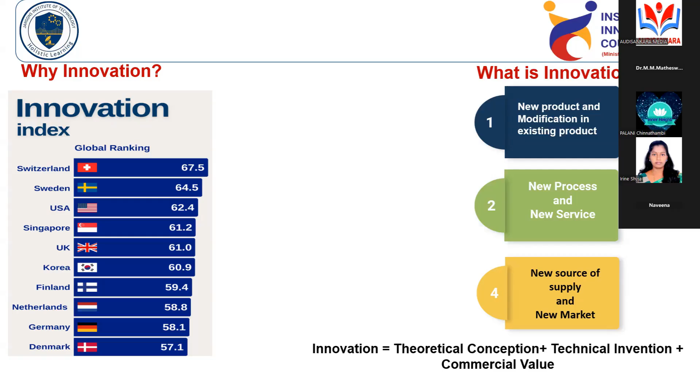We have to focus on the societal problem, how that societal problem will be solved with our technical knowledge. So how do we develop the innovation?

There are multiple case studies available, and this is not the only way, but one way is we may use the design thinking concept for innovation development. Design thinking consists of 5 steps. If you use these steps the first time in a linear manner, then in further iterations we may go with the steps in a non-linear manner up to the final product being developed.

In the first step, one is empathize. What is meant by empathize is, if you want to develop any product or service, we have to view the problem from the customer's point of view. That is a very important thing. If you are developing any product and it is not used by the customer, it is entirely wasted. So we have to view the problem from the customer's point of view.

For example, you know that Tata came up with a wonderful product known as the Tata Nano car, but unfortunately it got failed. Why did it fail? They marketed the product as a poor man's car. That is a major issue.

They did not view the problem from the customer's mindset. In India, we purchase a car only for our social status. But Tata Nano was marketed as a poor man's car, and no one wanted to get a poor man's car in those days. So if you want to solve any problem, first view the problem from the customer's point of view—that is empathy.

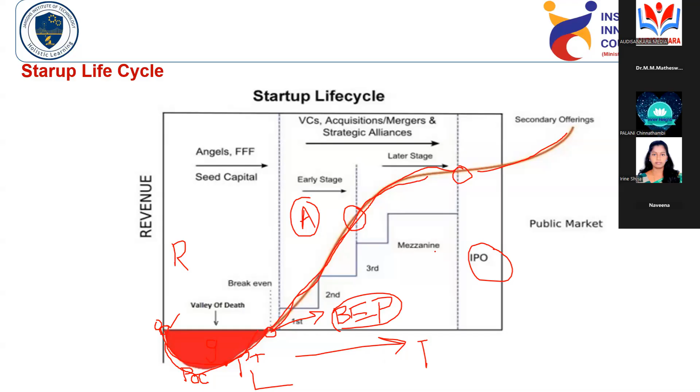So the next important thing is we move on to the requirement of solar thermal energy. Why is solar thermal energy needed in the industries? So look at this chart: the global energy consumption is 360 exajoules, and among that, 32% will be used by the industries.

Among the total, 32% will be used by the industry, 31% by the transport sector, 24% by the residential sector, and 13% by the other sectors.

Among the 32% energy utilized by industries, 74% of energy used in industries is in the form of heat only. Only 26% of energy consumed in these industries is electricity. At present in industries, this 74% amounts to 85 exajoules. Among this 74%, 45% is given by coal, 30% by natural gas, 15% by oil, 9% by renewable, and 1% by others.

So you may take that 85 exajoules of energy is required in industries throughout the world. Among that, 30% of the energy is required at low temperature range, that is only up to 150 degrees Celsius. Then 22% comes under medium temperature range, that is 150 to 400. Then 48% is required at high temperature range, that is above 400 degrees Celsius.

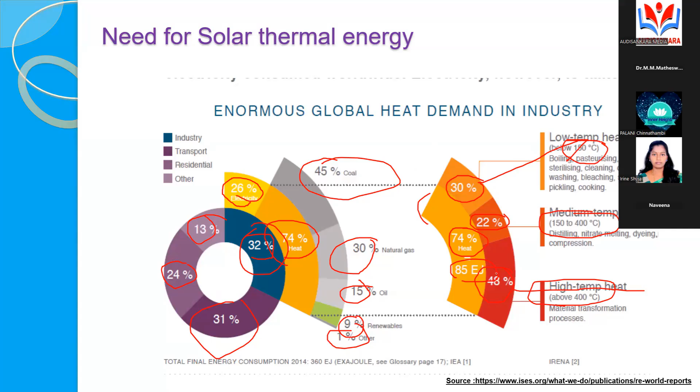Then the second point is, at present all the developing and developed countries are bothering about the 3 E's. What are the 3 E's? Energy, economy, and environment. So all the developing countries want to develop their economy without affecting their environment and the economy. That is the major challenge for all countries.

All the countries also want to reduce their global emissions to net zero emission before the year 2050. That is the ultimate objective for all countries in the world. Look at that. In 2015, the greenhouse gas emission was around 30,000 million tons of CO2 equivalent, but we want to reduce it to zero within the year 2050. That is the ultimate objective for all countries.

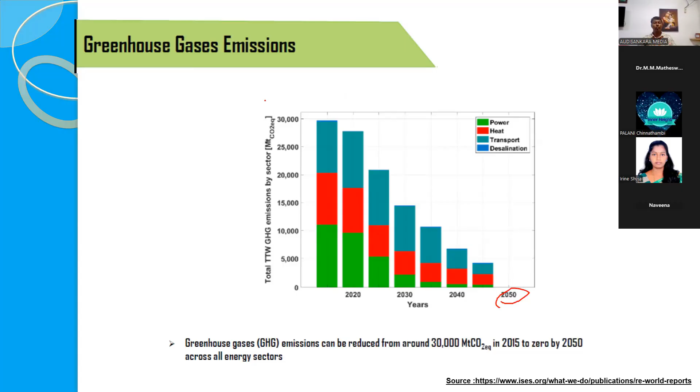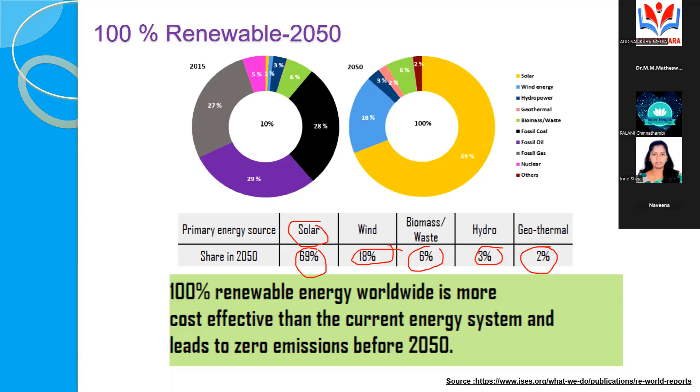So if you go for net zero emission, the technical people, environmental people, and economists find out that solar contribution will be 69%, wind will be 18%, biomass will be 6%, hydro will be 3%, and geothermal will be 2%. So if the world wants to go for net zero emission, solar energy will contribute 69% to reduce the emissions for net zero. That is another important thing that all people are thinking about solar, right? So these are all.

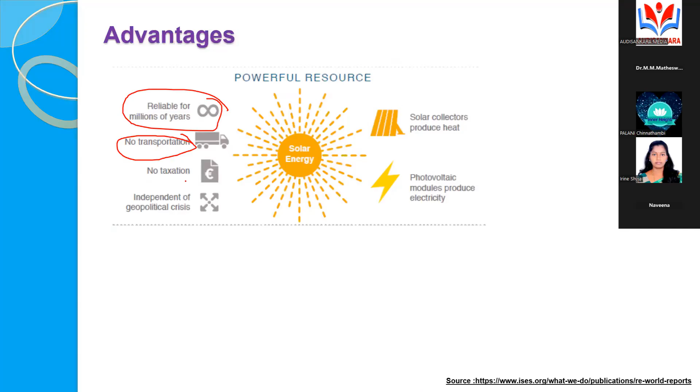So the another important thing is, if you want to go for industrial process heating, the energy is available in solar. The second one is all countries want to go for net zero emission, so there is huge potential energy in solar. Then another advantage is solar is a reliable source of energy. There is no transportation required, no taxation. Then it is not affected by geopolitical crisis. So these are all the major advantages of the solar system.

So how to use solar energy for energy generation means there are two technologies available. One is solar thermal collectors, another one is solar photovoltaics. What is solar thermal collectors means? We may directly convert it into heat energy using flat plate collectors and evacuated tube collectors. If you convert solar radiation into heat energy, that is known as solar thermal collectors. Instead, if you convert solar radiation into electrical energy, that is known as solar photovoltaics. So these are all the advantages.

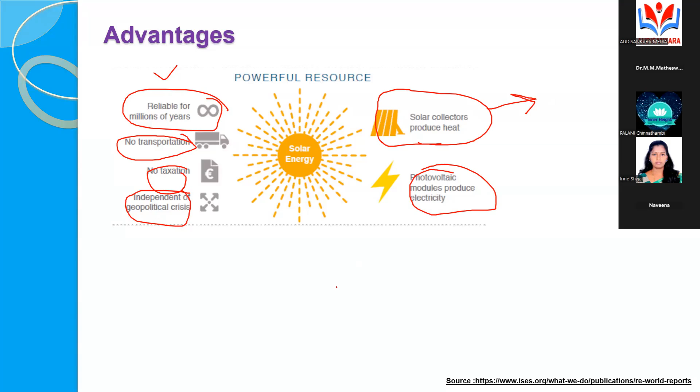So at present, we know there is an industrial requirement, there is an environment requirement, and there is an advantage of solar with these points. But what is the actual contribution of renewable energy in the world? Look at there. At present, the global renewable energy share for energy generation is nearly 23.7%. This is global, in all sectors. What is the share of renewable energy in industrial heating? That is only 9%. This is only in industries.

Among this 9% of industrial heating process, what is the contribution of solar here?

Look at the data. This is very unfortunate. The solar energy contribution in industrial process heating is 0.001%. It is very, very less. We know that there is a need of heat, and we know we have to go for net zero emission. Solar also has these advantages, but still how much percentage of industries are using this energy? Only 0.001%.

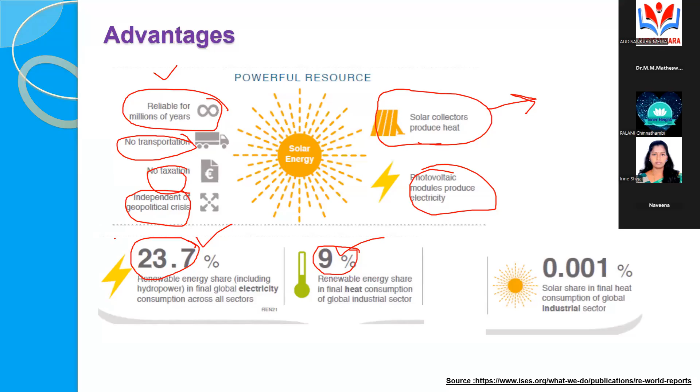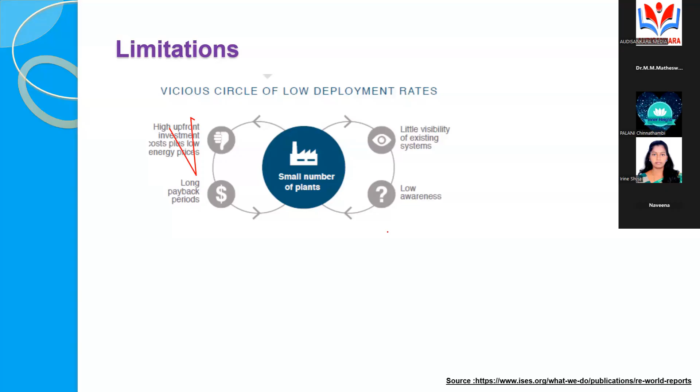Why does this happen? These are all the major limitations in solar. Why is there high upfront cost? Initial investment is very high, so that's why longer payback will be there, and also lower awareness. That's why innovation is required in this area. We need low cost, low payback, and effective technology to use this resource for industrial process heating. So that is the major limitation in solar: higher initial investment and longer payback period. These are the major limitations we have to overcome.

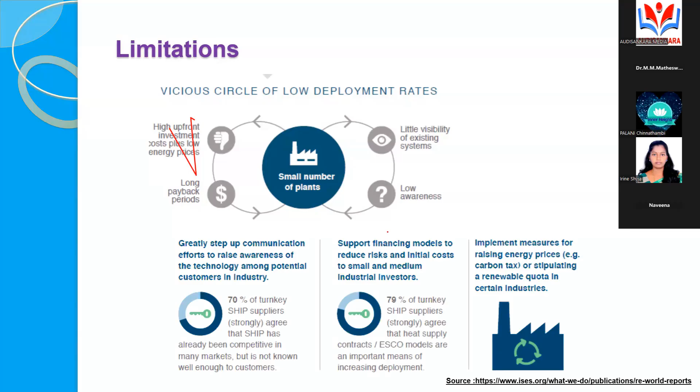At present, the solar heating in industries is given a general name known as SHIP system, that is, Solar Heating for Industrial Process heating. There is a set of collectors which heat the air or water or any other working fluid. Then the energy is stored in an energy storage unit, and the working fluid also goes to the industry for process heating applications. So this system is known as SHIP systems.

At present, nearly more than 500 industries are using this type of system for their process heating applications. The installed area, that is 4 lakh square meters, is installed throughout the world. This 4 lakh square meter is approximately equal to 280 megawatts of thermal energy. That is known as solar heating for industrial process heating applications.

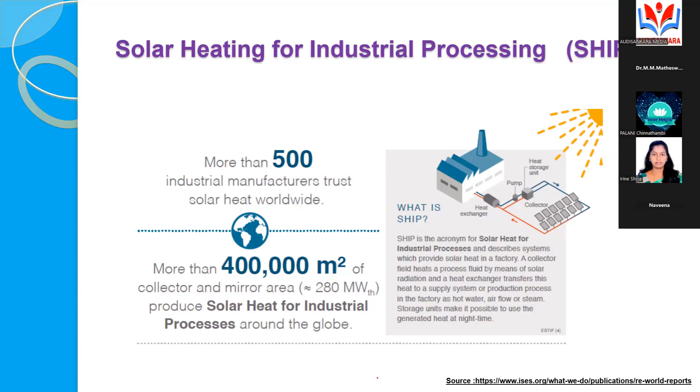With the help of this, TI Cycles reduces 56 liters of oil per day, and TVS Motors reduces 64 kilograms of LPG per day. These are all the smaller systems available in India using solar heating for industrial processing. So this is the status of India.

So what happens in the rest of the world? SHIP systems are also used in mining industries. Mining is very important at present because there is a huge need for electric vehicles, so we have to produce batteries, making mining very important work. In mining we need a huge amount of hot water for the separation process. For this purpose, solar water heaters and solar air heaters are used for segregation and drying purposes of these materials.

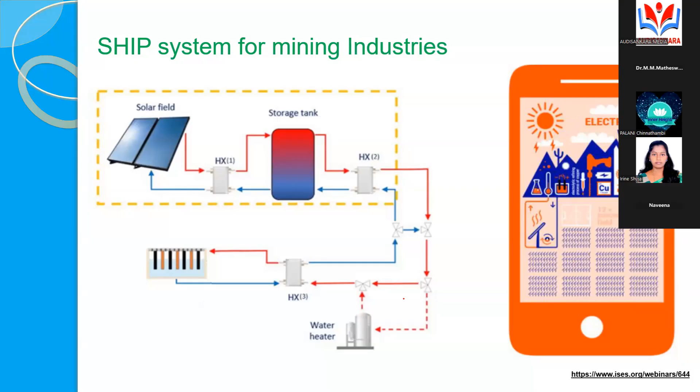I will show two case studies. Look at the Gaby mining company, available at Chile. Look at the area: 39,300 square meters of flat plate collectors are installed there, approximately equal to 10 football grounds. Look at the size of the plant. One water collector is 2 meters cross 1 meter, that is the area of one water heater. So look at there, what is the total surface area?

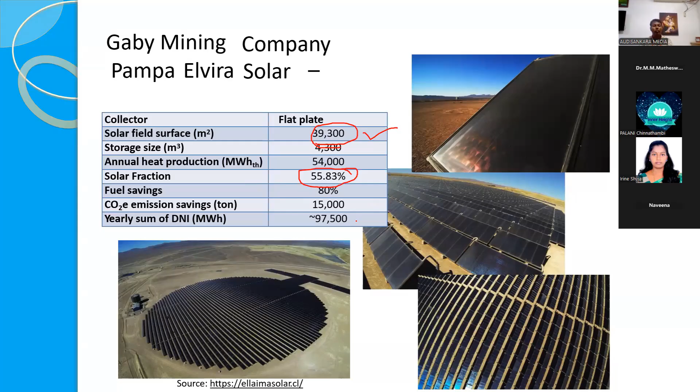If you use this, they are able to produce 54,000 megawatt-hours of thermal energy. Among the total energy requirement in the industries, 55% is shared by this plant. This is actually at Chile, which is a desert. They install such a plant to produce a higher amount of hot water, especially in mining industries.

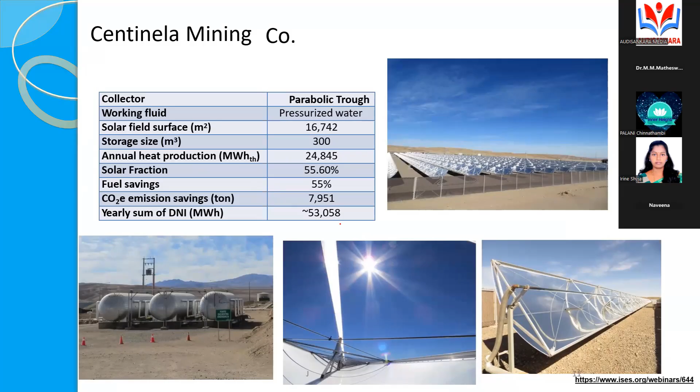Then I will go with another mining industry known as Centinela Mining Co.. Here also, the solar installed area is 16,742 square meters. The annual energy produced by this system is 24,845 megawatt-hours of thermal energy. Among the total requirement of energy, 55% is supported by this system. These are all such huge plants available in the world, especially for supplying hot water.

So I have one more plant, Ram Pharma, available at Jordan. It's a medical company in the pharma industry. They use Fresnel collectors to produce hot steam. The installed area is 550 meters square, and the thermal power produced by the system will be 222 kilowatts of energy.

Look at the operating temperature: 210 degrees Celsius of steam is generated. The fuel saving will be 42%.

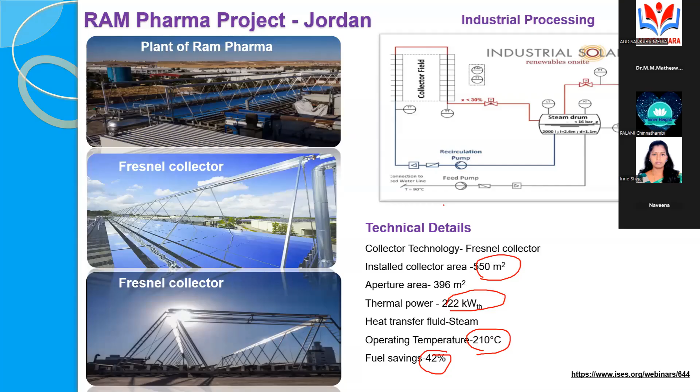So these are all big plants available throughout the world used for mining industry, pharma industry, all these things they are used. But India is an agriculture nation. At present, we are using this type of system especially for low temperature applications, especially in agriculture drying.

In agriculture, one important thing in India, throughout the world, is that a particular commodity, you may take moringa or any commodity, may be produced during a certain time period. So at that certain time period, all the farmers come up with a huge quantity of that product. So in the market, the product value gets reduced, and if the product is not sold out, the entire thing will get wasted.

You know tomato and onions, how during a certain seasonal time, huge amounts of products will be available in the market. During the off season, the price will go very high, but the product is not available. So that is the issue.

One data says the wastage of onion in India is nearly about 3,000 crores per year. So that is the data we get.

So one idea to reduce the post-harvesting losses in India is to dry those products and convert them into a value-added good, to be sold in the market during the off season. So if you want to dry those products...

At present in the market, there are enormous dryers available - electric dryers, heat pump dryers, conventional solar dryers, all these things are available. So our idea is how to use these solar dryers, especially for use by Indian farmers, to convert their product into a value-added product and sell it at a higher price.

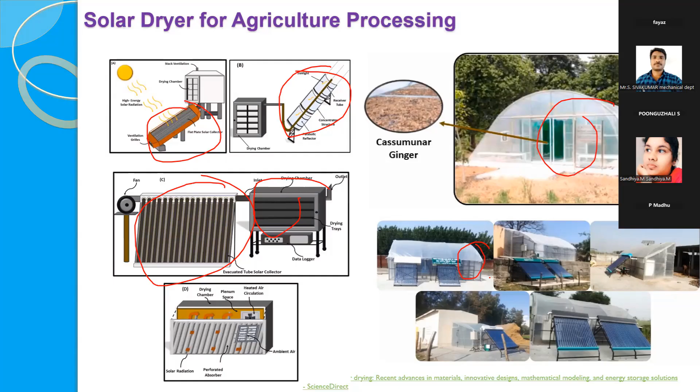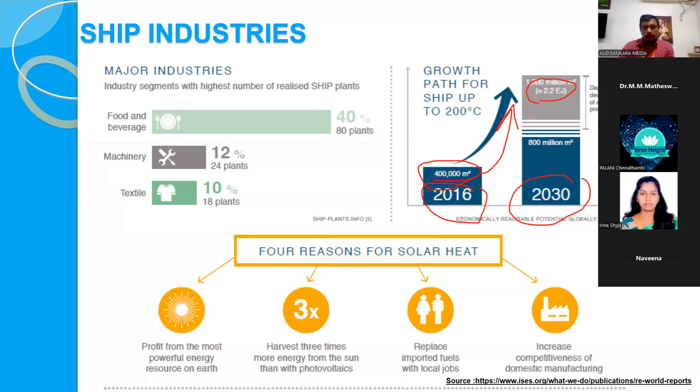Look at this graph. At 2016 data, there are 4 lakh meter squares of solar SHIP systems installed throughout the world. Look at this projection. Within the year 2030, it is expected 1,300 million meter square of solar SHIP systems to be installed throughout the world, expected to produce 2.2 exajoules. But due to COVID, there is some drop in this data.

So there is a huge opportunity. Even though we know the requirement and there is a need, solar is still lagging, it is not effectively integrated in all the industries. Why? There is a lack of education and training, a lack of suitable planning and guiding tools, and a lack of awareness, and industries are only looking for long-term proven technology.

For example, in a textile industry, if you need steam, immediately the company goes and purchases a boiler. They don't think about solar. Then there is a high initial investment, the system cost is also very high for solar at present. So these are all the challenges we have.

So with these things, we understand that there is a need for solar energy, and these are all the drawbacks and challenges, so as to effectively integrate these systems with the actual application of the industries. So what is the thing? We have to develop a proper design for solar thermal systems for any industry, it may be agro processing or industrial process heating. So we must have proper design guidelines.

We have to reduce the initial investment, create a lot of education and training, and develop and promote the system for industrial usage. So these are all the challenges faced by the researchers and innovators, especially in solar air heating.

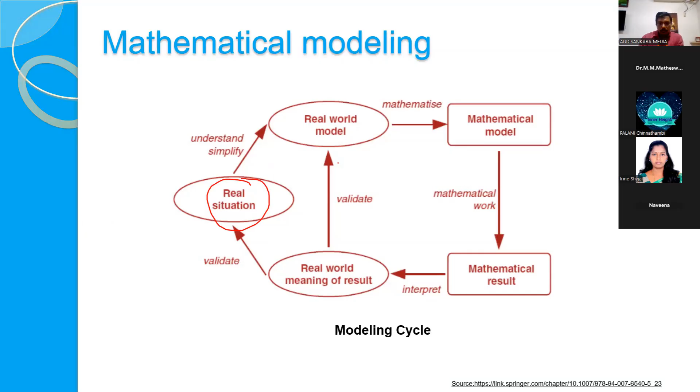If we go for actual experimentation, the cost will be more. So we try to make a suitable analytical or mathematical model to check whether the idea will work or not. My idea is converted into mathematical equations, then these equations are converted into linear equations in a mathematical model. These equations are solved under actual environmental conditions, and we validate with the real system to check whether the idea is working or not. So that is the first step: developing the analytical model for our solar air heaters.

So what is existing, and what is our new novelty? Look here - this is the simple solar air heater. In the normal air heater, we have very simple components. The first component is known as glass cover, the second is the absorber plate, the third is the jet plate, and the fourth is the back plate.

What is meant by jet plate: the plate looks like this, it consists of a lot of perforations - perforation means a lot of small holes. This plate is attached here. In a normal solar heater, the air passes only parallel to this absorber surface.

So what happens when the sunlight falls over the glass cover, it passes through the glass cover and heats this plate. The plate gets heated. Once the plate is heated, if you pass the air under this plate, the air gets heated and goes out. Very simple - ordinary radiation mode of heat transfer and convection mode of heat transfer, the air is getting heated.

But if you use this simple solar air heater - here is the air, this is my absorber plate - when the air passes over there, a boundary layer gets formed like this. This boundary layer acts as an insulator for heat transfer, so the heat transfer gets reduced due to this insulating layer. That is the imaginary boundary layer.

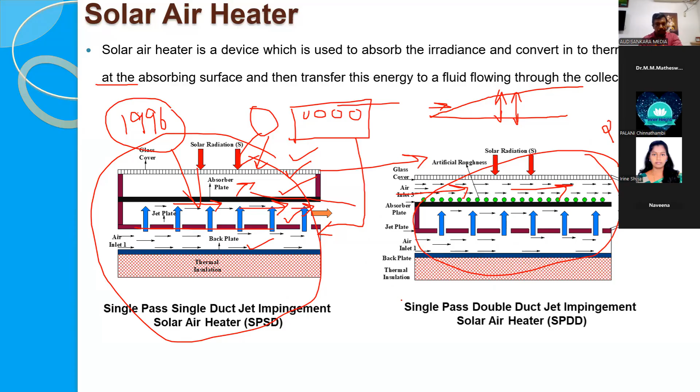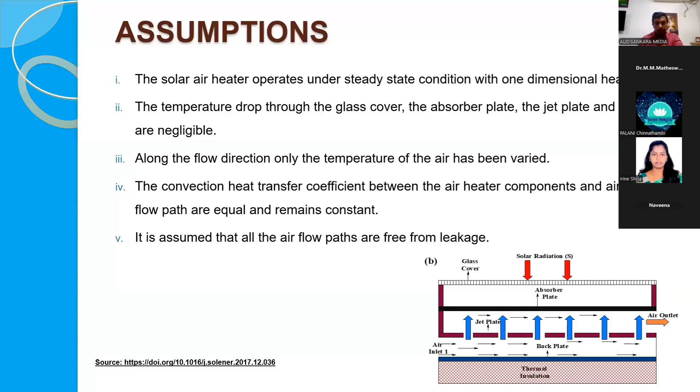Before developing an actual experimental model, I want to know whether the idea will work or not. For that purpose, I am developing an analytical model to check whether the system works or not. You know that for any system, if you develop an analytical or mathematical model, we have certain assumptions. So I am developing these assumptions. After that, it's a very simple case.

If you want to develop an analytical model, there are 3 equations: continuity equation, momentum equation, and energy equation. If you write these equations for each component of your solar heater or water heater, the governing equations will come out. You know that in the world, all systems work based on some fundamental physics. If this fundamental physics is converted into mathematical form, those things are known as governing equations. If these equations are solved for actual boundary conditions, that is known as analytical modeling.

So what is the physics here? There are various components. The first component is the glass cover - look at there, I have a glass cover here. What is the physics in the glass cover? As per the steady state condition, the energy supplied into the glass cover is equal to the energy that comes out from the glass cover. This is the fundamental physics we have: energy into the glass cover always equals energy out.

So how does the glass get the heat? Only from solar radiation. This first term represents the energy injected into the glass cover from the sun. It also gets heat from the absorber plate through convection mode of heat transfer, and also from the absorber plate through radiation mode of heat transfer. So this is radiation, convection, and radiation. I write this equation based on the fundamental heat transfer problem.

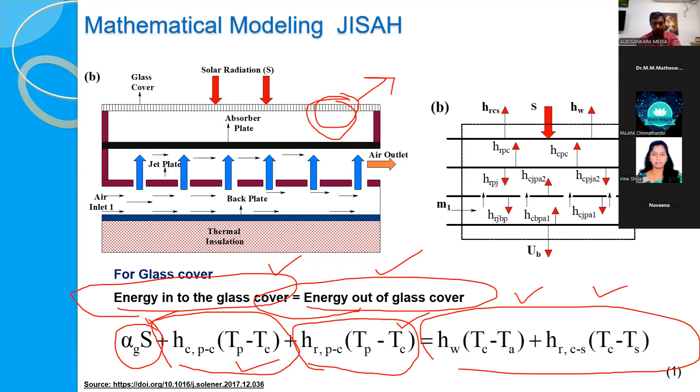I write this on the left-hand side, so these 3 terms represent the energy into the system. Then how does the energy go out? The energy goes out to the ambient and the sky with the help of radiation and convection mode of heat transfer. I will put those terms on the right-hand side, so energy in equals energy out. This is for the glass cover.

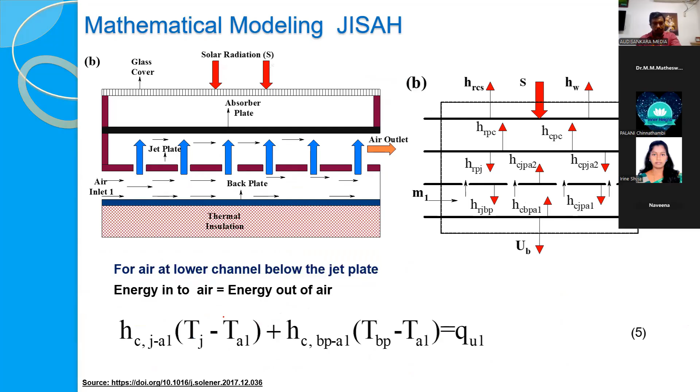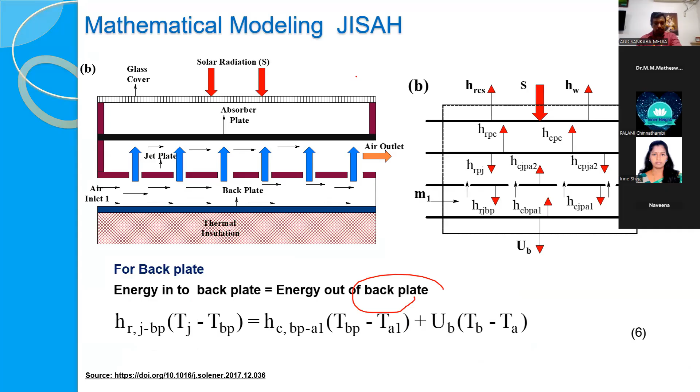In the same way, I have to write it for the absorber plate, and in the same way for the jet plate. There are also 2 airflow paths: the upper airflow path and the lower airflow path. I will write the energy balance equations for the airflow paths also. Then the last one is the back plate. So I have 6 components in my solar air heater, and I will get 6 equations.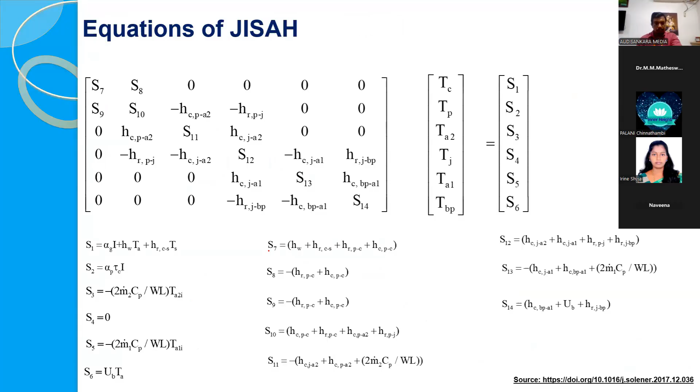Once I have the 6 equations, these algebraic equations are written in matrix form. Then I will write code to solve this matrix using a matrix inversion technique, and I will get the results. These are all the various formulas used to calculate the convective heat transfer coefficients, and there are Nusselt number correlations. With the help of these equations, I will calculate the various constants and variables required to solve the mathematical models.

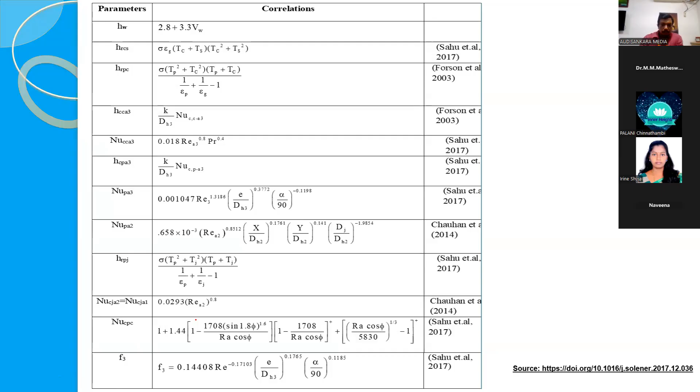Once I solve this, I am calculating the thermal efficiency, thermohydraulic efficiency, and exergy efficiency. Thermal efficiency means how much energy is supplied to the system versus how much energy I'm converting as thermal energy from my solar heater. Thermohydraulic efficiency means, among that collected energy, how much is consumed for pumping power - that is to be subtracted, which gives the hydraulic efficiency. Exergy efficiency is the second law efficiency.

So what is the maximum possible efficiency when it is reduced to ambient conditions? That is known as exergy efficiency.

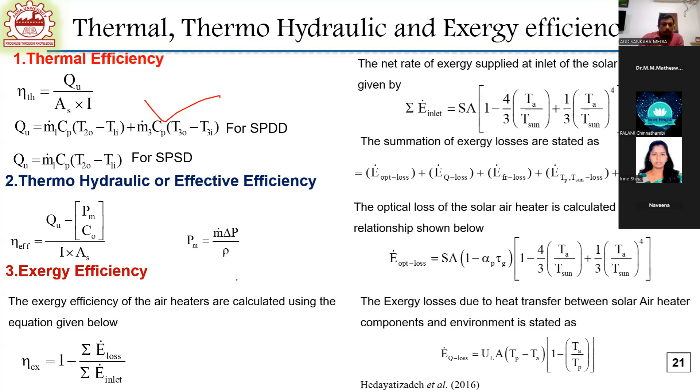This flowchart shows how I am developing the code and how the code will work. Look at that, the convergence criteria will be 0.01 degrees Celsius. With the help of this process, I am solving the equations.

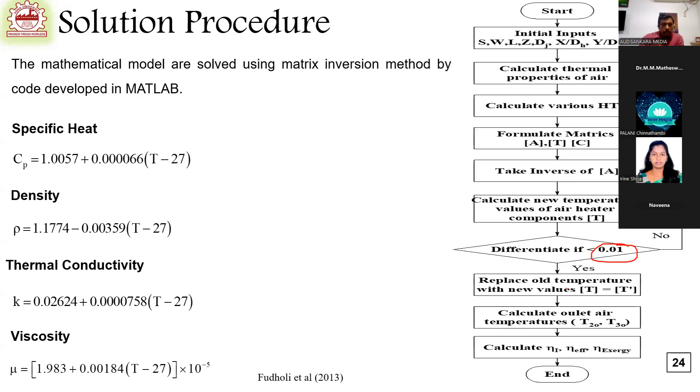Once I solve these things, I will get the results. Look at that, the thermal efficiency of the system and the effective efficiency of the system for my case. Look at this line. For an example, I will take this effective efficiency.

Look there, this is for the simple system. These lines are for my proposed new system. There are multiple lines in my proposed system because I am changing the roughness of my design. There are various designs I am using in the roughness.

So before going to the actual experimentation, I know how much percentage improvement there is in my proposed system when compared with the existing system.

SPSD means single pass single duct jet impingement solar heater. SPDD means single pass double duct jet impingement solar heater. Look at there.

At 0.01 kilogram per second, at this condition, my existing system will be 60%, but the proposed system with arc-shaped roughness will give around 70%.

So with the help of that, before going to the experimentation, we are able to know how the performance of the system will be. That is the power of analytical modeling.

If you know the proper analytical modeling, we know how the system will perform, what are all the key parameters, and what dimensions need to be fixed to get the maximum efficiency of those systems. That is known as optimization.

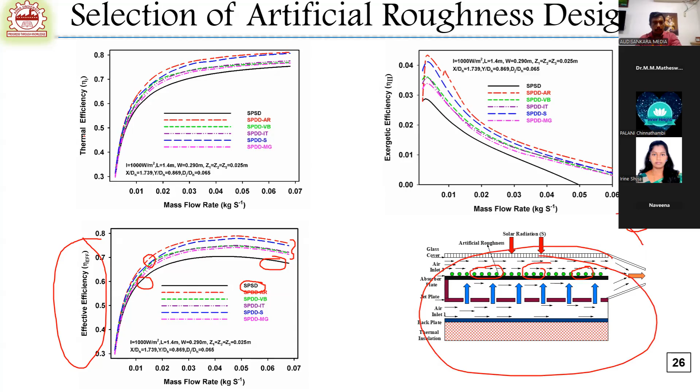So initially in 2017, I developed this type of jet impingement solar air heater and checked its performance. These are all the other graphs with various flow rates, showing how the useful energy gain will be.

If the inlet temperature is varied, how will it be affected? What is the effective efficiency with respect to the length of the solar air heater? Look at there, if the length is increased, the performance will improve.

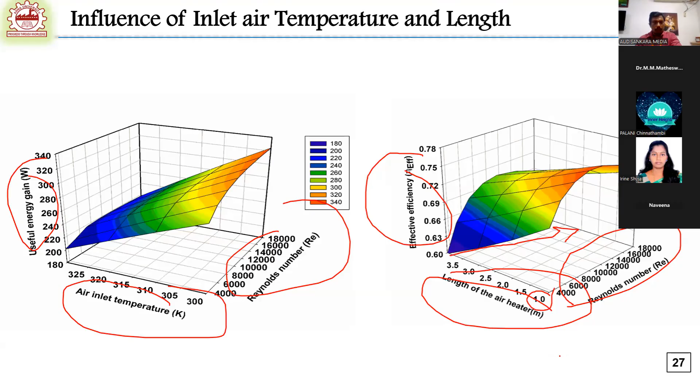But up to a certain case, if you go with 1 meter, look at there, what is the flow rate to be measured. Based on the temperature and heat output requirement from this data, I may be able to select the length of the solar air heater. Those things were done analytically.

Then, in my solar air heater, there are two passes, one at the top and another at the bottom. So what mass fraction should be maintained? Should the bottom be higher or the top be higher?

In my simulation, I found that if you maintain both sides equal, that means 50% of the flow at the top and 50% of the flow at the bottom, we will get maximum efficiency. Those things we will get.

So after doing this analytical model, only then do we know the dimensions to be fixed, and for a particular temperature, what length and width to be fixed. We analyze all these things, then develop the actual experimentation, and develop correlations for Nusselt number and friction factor. This is the one type of solar air heater we developed in 2017.

But still there are some drawbacks. The drawback I faced here is that the flow rate will be around 100 kilogram per hour. If you go for the actual market, 100 kilogram per hour is very, very low for such a huge system.

For example, if you go for solar dryers in the market, they range from 400 square feet to 1000 square feet. If you supply only 100 kilogram per hour, when will the dryer get heated? So that is a major drawback and challenge for us.

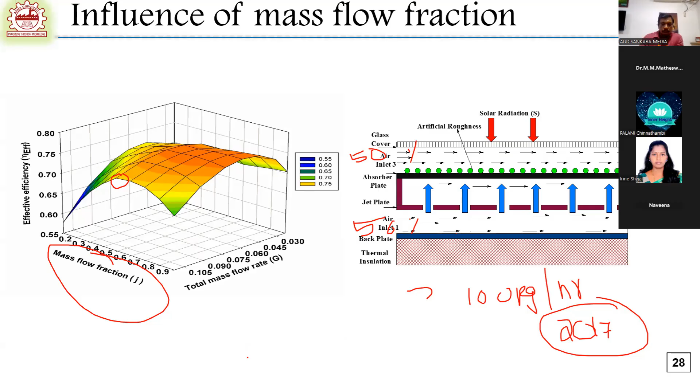So then I am developing another solar air heater. In this solar air heater, we are integrating a rectangular solar air heater with fins and baffles. Fins will enhance the area and increase convective heat transfer. Then we are attaching baffles.

So if you have fins and baffles, the turbulence will get increased and the solar heater performance will be increased. So we developed this model and tried the analytical model, with fins and without fins, with baffle and without baffle, what baffle thickness to maintain - 5mm, 10mm, 15mm - and how the performance and efficiency will be. From the results, we identified that arc-shaped roughness with the fin solar air heater with baffle thickness of 15mm has higher performance compared with other studies.

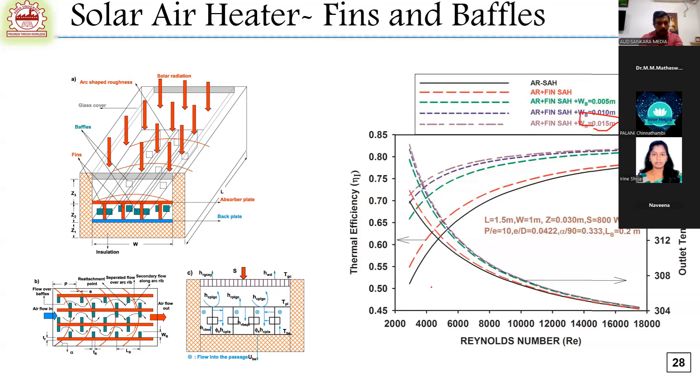But in the flat plate solar air heaters, the major drawback is we cannot go for much higher flow rate. If you increase the flow rate, the temperature will get reduced. That is the major drawback, and also the pressure drop will be very high. So to overcome this, I am developing one more solar air heater to reduce the pressure drop.

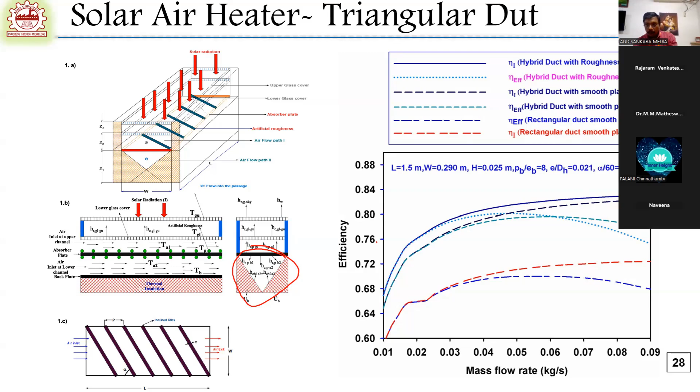So this is the thing. From 2017 to 2021, I worked most of the time with triangular duct and rectangular duct solar heaters. The major drawback we found there is that at higher mass flow rate we may get lower temperature. So that is a major drawback.

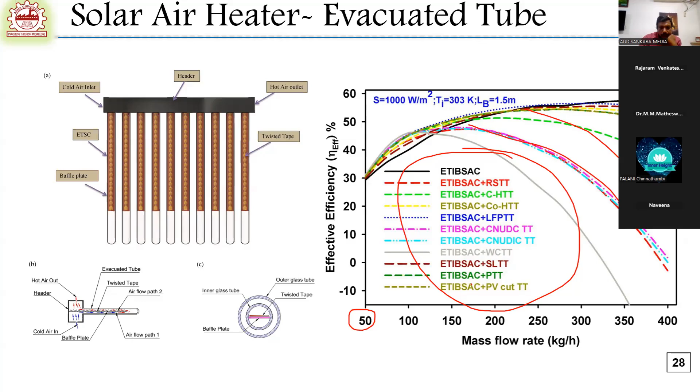So if you want to do any experimentation, we need grants and funds. In 2022, I developed all these systems as an analytical model, with a small experimental setup in my institute. During that time, the Ministry of Consumer Affairs announced a challenge known as the Onion Grand Challenge. They required a dryer, especially for onion drying, needing a much more efficient drying solution. That's why we obtained an initial small grant.

We won the Onion Grand Challenge in 2023, to convert our idea into proof of concept and proof of concept into a prototype. So what idea did we propose there? Look at this slide - we integrate the evacuated tube with jet impingement technology.

In the solar air heater, if you use turbulators, the pumping power will be high. Even though the output temperature is good, the pumping power is high. So instead of turbulators, what we proposed in the onion grand challenge was that air heating would be done in the evacuated tubes with the help of jet impingement technology. So we will get hot air, 300 kilograms per hour at 60 degrees Celsius, with low pumping power consumption. Then this hot air is distributed to my dryer

inside the dryer for effectively drying the onions. That is the proposed idea for the Ministry of Consumer Affairs. The Ministry gave only 75,000 rupees to develop the air heater for us. With the help of that, we developed the solar air heater. Then in the second round, they gave 2 lakh rupees to develop a small prototype.

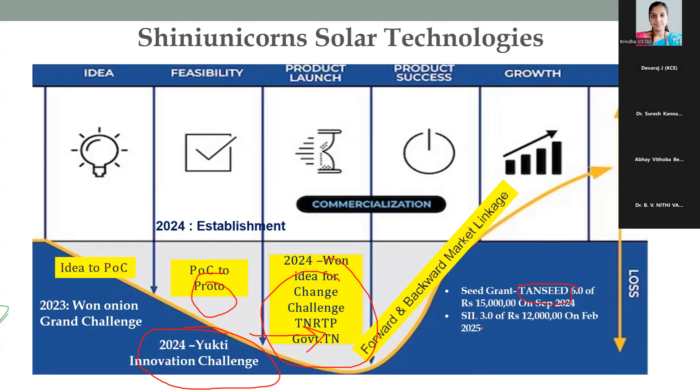At present, we are developing solar dryers especially for farmers. The problem we are solving is reducing post-harvesting losses in agriculture industries and value-added product manufacturers. This problem occurs for our customers during the Kharif and late Kharif periods.

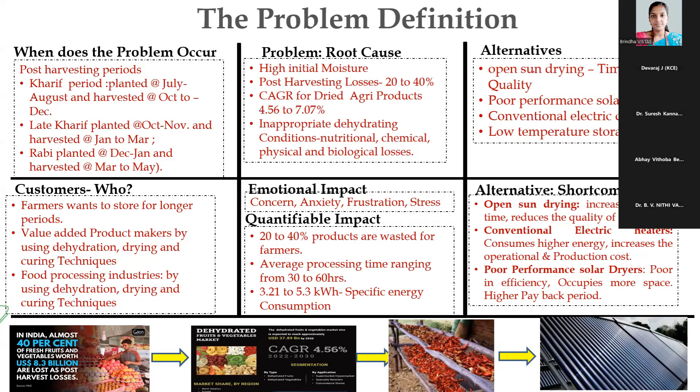What is our idea compared to existing dryers? We are using jet impingement technology within evacuated tubes to produce enough hot air and supply it into the greenhouse dryer to get uniform temperature.

What is the benefit to my customer using this technology? The space reduction may attain up to 32%. The drying time may be reduced by 26 to 40%, and the production cost will be reduced by 28%. We also have DaaS and NaaS systems to reduce the payback period for our customers.

This is the system proposed. Our technology readiness level is assessed by Amrita Technology Enable Center, and our jet impingement solar air heating technology is patented, with the patent to be granted in 2024. At present we are at technology readiness level 6.

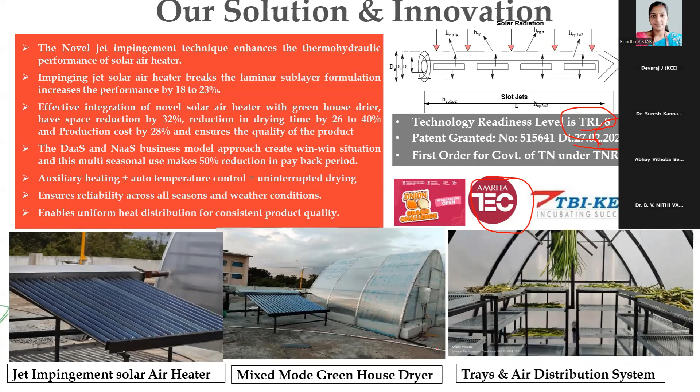This is the flow chart of our product, the Shiny Jet Agri Dryer. We have a blower that can supply 100 to 150 kilograms per hour. The air is heated up to 50 to 70 degrees Celsius.

Then the hot air is supplied to the greenhouse dryer. With the help of an air distribution system, uniform air is supplied. At present we have dried onions, moringa leaves, and water hyacinth for effective drying. After drying, we check our product in the lab to see if it has sufficient nutrition and shelf life.

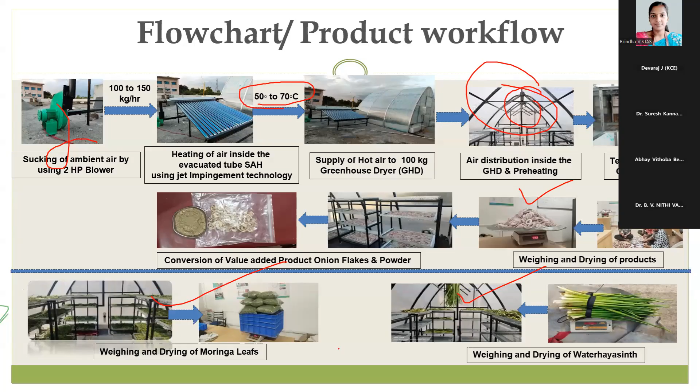We checked all these things under laboratory conditions, and it works fine. That is the stage our system works through. After doing all these things, we install the system. This is the first figure.

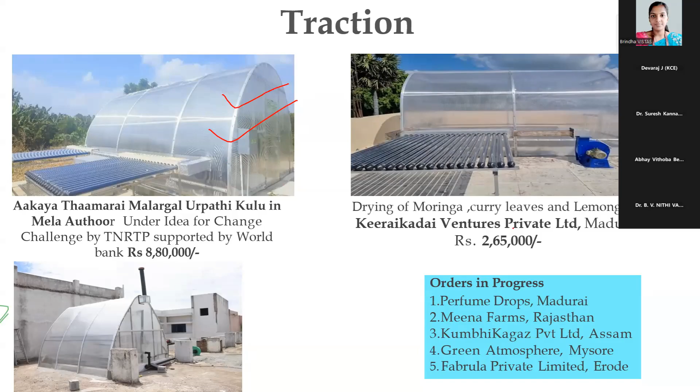We sold our first product for 8,80,000 rupees to Aakaya Thaamarai Malargal Urpathi Kulu under the support of TNRTP, with the plant located at Thoothukudi. Our second product was sold to Keeraikadai Ventures Private Limited, Madurai. Keeraikadai Ventures produces soups from various spinaches, so they need the dryer to dry all these agro products.

So the company head office is located at Coimbatore, and the manufacturing unit is located at Madurai. We installed this dryer at Madurai, that is the second plant we installed.

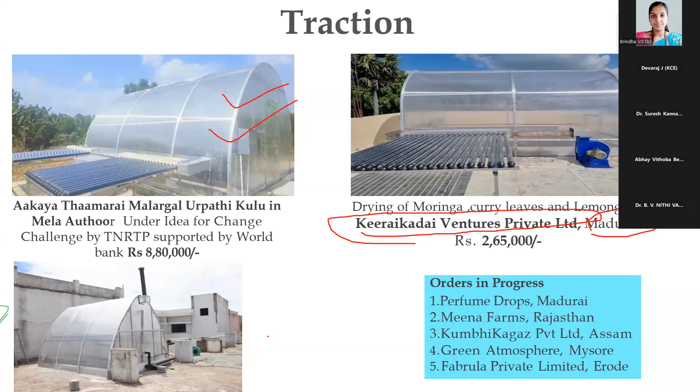Our third plant is installed at Manju Flowers. They are producing health mix and exporting those things, so they needed one dryer. We installed a 100 square feet dryer in their company's upstairs for drying the various agro products. So this is the third installation we completed.

At present we are working with Perfume Drops, Madurai. Perfume Drops is a company that takes perfume from flowers. After taking the perfume, the waste flowers will be in a highly wetted condition, so we have to dry it. After that only it can be converted into other value-added products. For this purpose, that company needs a dryer, so we are working with them.

Then Meena from Rajasthan, they already have a solar dryer. They requested us for how to connect the air heating system.

KumbhiKagaz is another company located in Assam. They are producing paper from water hyacinth waste, so they need it for paper drying purposes. We are working with them.

Green Atmosphere Mysore is another company. They work with a special type of banana at Mysore and they want to convert those bananas into food products for newborn babies. So the question is how to dry the ripened banana and unripened banana. For this purpose, the company connected with us.

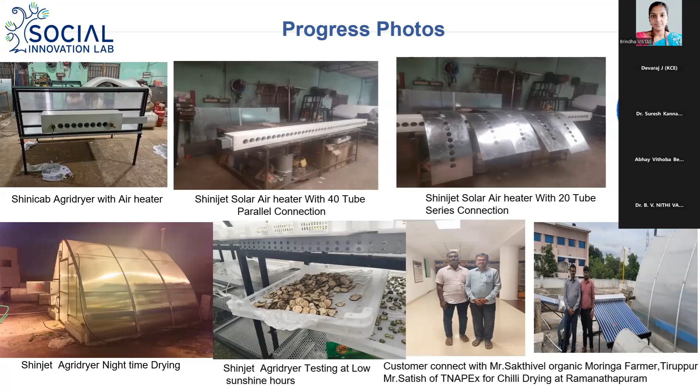These are all the innovations developed by our company.